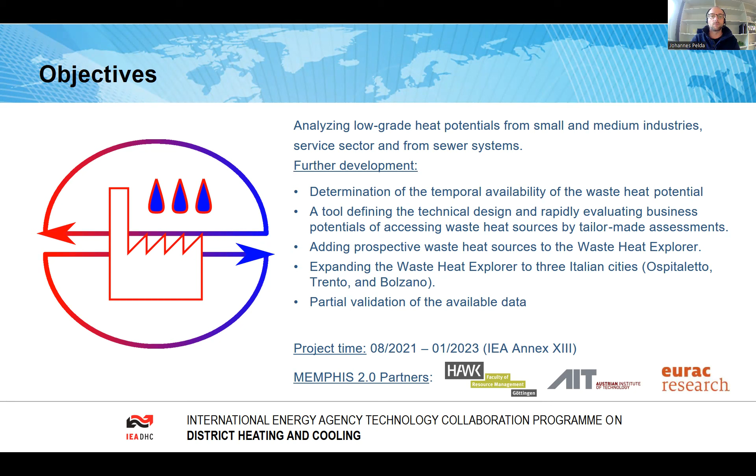With a newly developed simulation model, temperature gradients as well as the origin of the wastewater flows can be calculated within a sewer network by using open data. Furthermore, the simulation model enables optimization to be carried out in order to find the best technical location for waste heat extraction from the sewer.

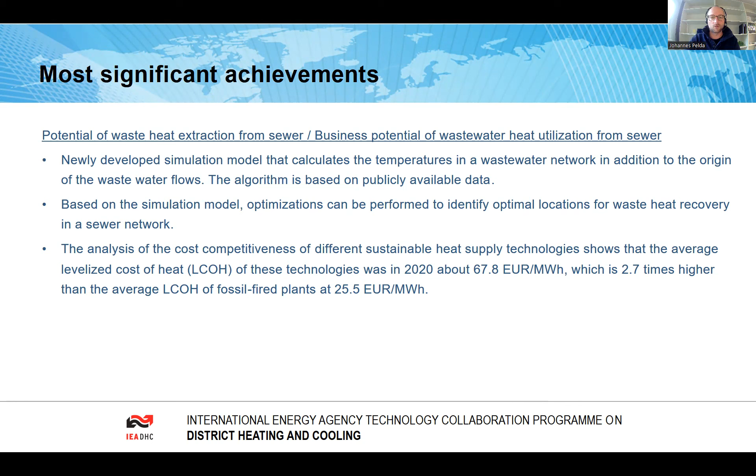The analysis of the cost competitiveness of different sustainable heat supply technologies shows that the average levelized cost of heat, LCOH, of these technologies was in 2020 about 68 euros per megawatt hour, which is roughly 3 times higher than the average LCOH of fossil-fired plants. The number of full load hours has the greatest impact on costs, followed by the investment cost of the heat pump and the electricity price.

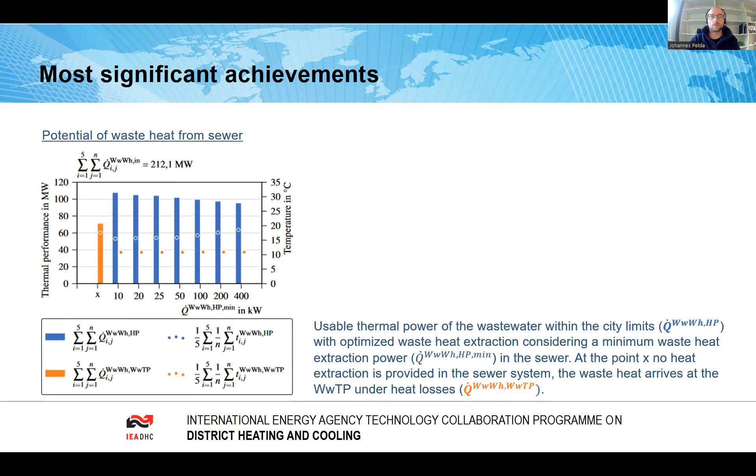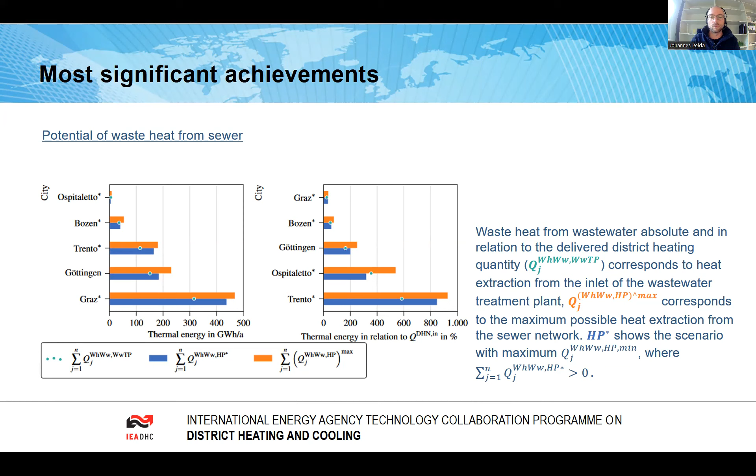The diagrams show the annual absolute waste heat potential and the potential related to the local district heating network. In the cities of Göttingen, Ospitaletto and Trento, the theoretical waste heat from sewer could supply more than 100% of the district heating demand, seen in the green dots for the inlet at the wastewater treatment plant and the blue bars within the city's limits.

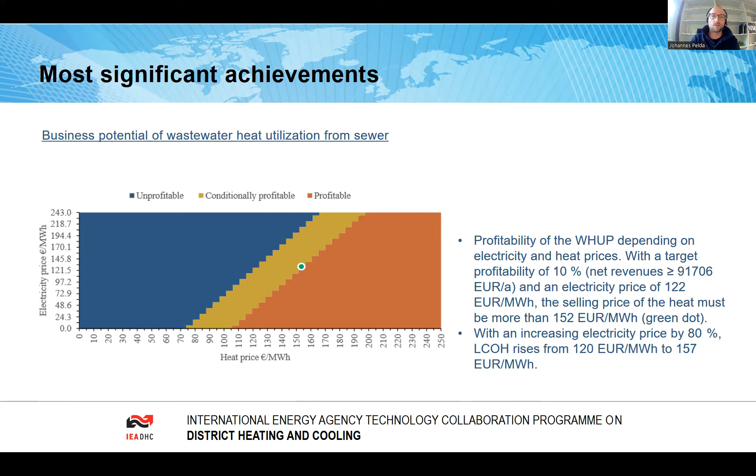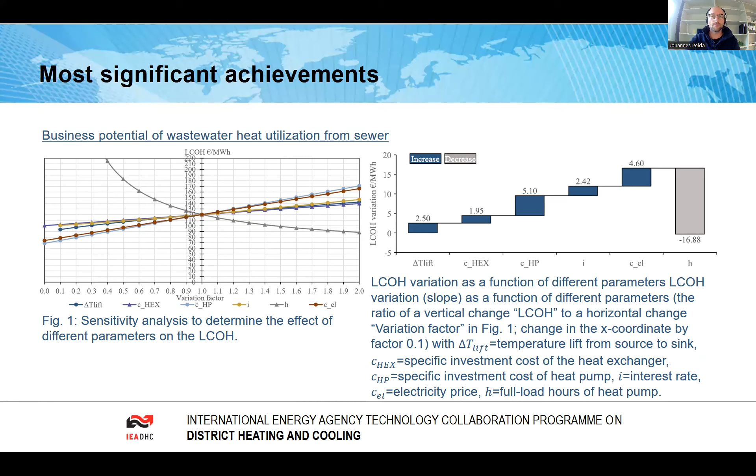Key achievements include an assessment of the impact of industrial decarbonization on waste heat potentials. The analysis was carried out on a qualitative basis for cross-sectional technologies and processes, for instance, exhaust gas or the cooling of process media, and on a quantitative basis for the iron, steel, and cement sectors. It revealed that, depending on the processes in an industry sector, changes in both directions are to be expected. For example, the electrification of combustion processes omits the waste heat from exhaust gas streams, while the decarbonization in the cement sector relies on the deployment of carbon capture technologies with additional waste heat streams.

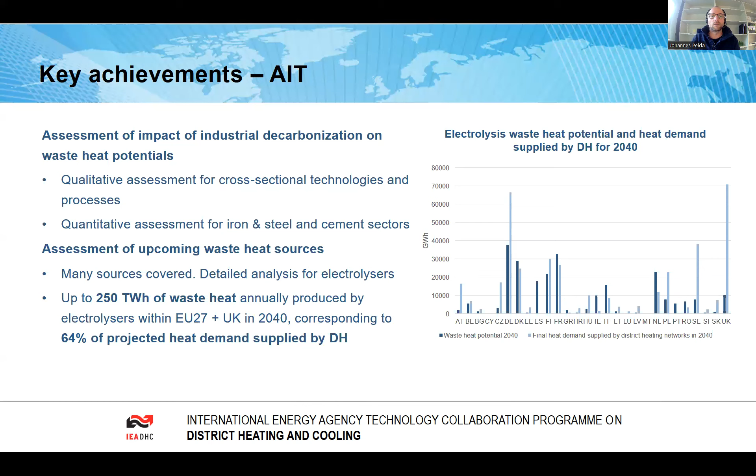In terms of assessing upcoming waste heat sources, a strong focus was laid on electrolyzers. The analysis revealed a waste heat potential of up to 250 terawatt-hours annually within the EU 27 plus UK by 2040. This equates to 64% of the projected heat demand supplied by district heating networks. The graph on the right side depicts the waste heat potentials and district heating demands broken down on a national level. It can be seen that there are countries where the expected waste heat potential from electrolyzers is greater than the district heating demand.

In terms of improvements within the Waste Heat Explorer, a techno-economic assessment feature was implemented. The methodology covers needed components for the waste heat utilization like heat transfer stations, buffer storages, district heating piping, and optional seasonal storages. Furthermore, it designs these components based on the chosen waste heat source and the user input on heat sink parameters. With the input of a few parameters specifying the heat sink such as its annual heat demand, temperature requirements, and the costs for heat supply with a reference system, and the drawing of the desired pipe route between source and sink, a quick assessment of the economic feasibility is performed.

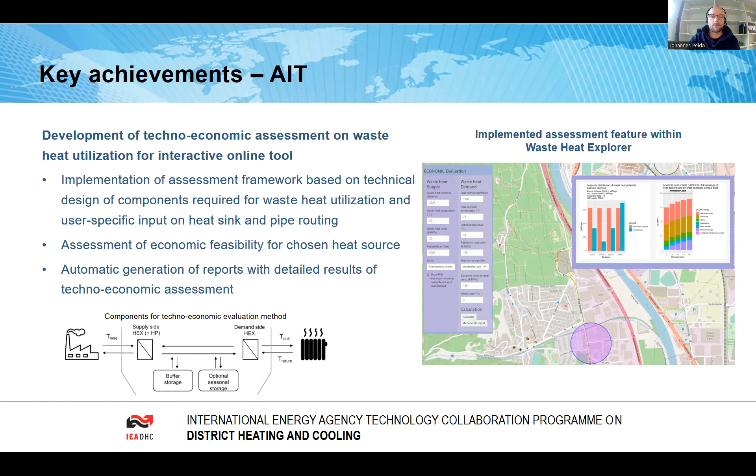A final achievement of the project is the investigation of further 3 cities in Italy and the validation of the methodology with real data on industrial facilities. During the project, the data for all industrial companies in the 3 cities, Ospitaletto, Bolzano, and Trento, were collected through interactions with the local chambers of commerce. The data include company location, number of employees and the industrial sector. In order to insert reliable information in the Waste Heat Explorer, some data preparation and cleaning was needed. In particular, filters and other checks were required for companies with a limited number of employees or multiple sectors.

The available data were then validated for selected cases, namely a foundry in Ospitaletto, a dairy, a vehicle manufacturing company, and a printing company in Bolzano, and finally a supermarket in Trento. Waste heat estimates based on MEMPHIS coefficients were generally confirmed. Only in one case, namely that of the dairy located in Bolzano, a strong deviation was observed. Here, the value estimated from company data turned out to be about 10 times higher than the one predicted by the algorithm.

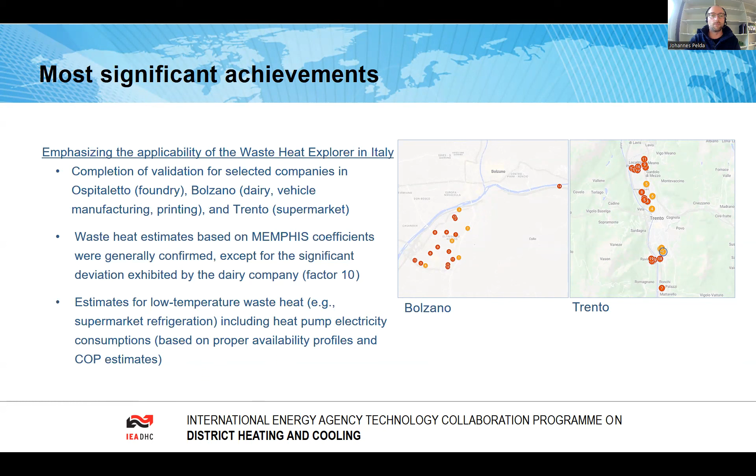Let me summarize. MEMPHIS II is an advanced project that builds up on the previous MEMPHIS initiative with a focus on evaluating and mapping the potential of waste heat from industrial processes, the service sector, and sewage water by using open data and service. In particular, MEMPHIS II has developed a simulation model that calculates temperature gradients and wastewater flows within a sewer network and is the basis for optimizing the location for waste heat extraction. The project also assesses the cost competitiveness of sustainable heat supply technologies, highlighting the impact of the number of full load hours, heat pump costs, and electricity prices on the levelized costs of heat.

Additionally, MEMPHIS II looks into temporal availability of waste heat from industrial processes, noting variations in waste heat potential during week and days, but not seasons. It also highlights the upcoming potential of waste heat from data centers and electrolysis processes that will further increase in the future. The Waste Heat Explorer significantly developed during the project, providing data on wastewater origin, temperature, and seasonality, along with information about industrial waste heat.

It offers a routing function for connecting waste heat sources to heat sinks and conducts automatic techno-economic evaluations, which are free for download. The newly added techno-economic assessment feature allows for a quick indication on the feasibility of a dedicated waste heat utilization project. Furthermore, data from industrial companies in Italian cities has been collected and validated, contributing to the project's comprehensive dataset. The project's holistic approach to assessing and using waste heat contains important information that can serve as a starting point for developing sustainable energy solutions. Of course, more detailed checks are recommended before the actual design work.